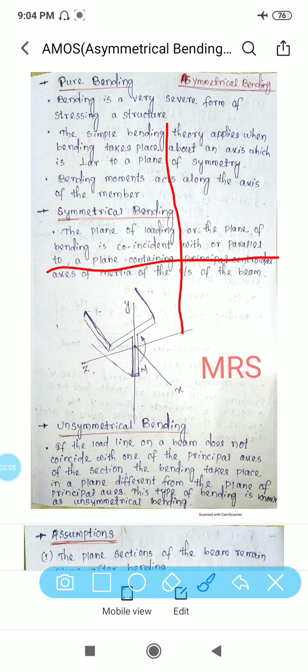Meaning, you assume this is your plane of loading, this is your plane of bending, and another is your plane containing the principal centroidal axis. If they coincide at a single point, then this is known as uniplanar bending.

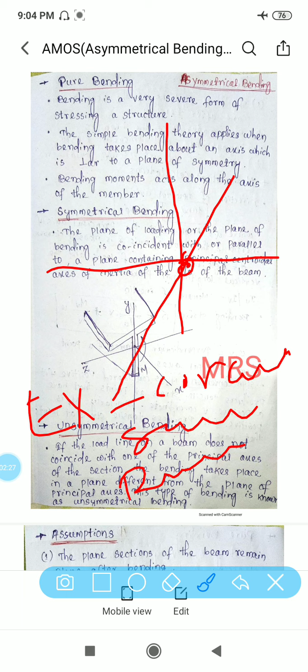Example: circular cross section, square cross section, rectangular cross section, and equal arm I section are examples of symmetrical bending.

Then, for unsymmetrical bending - if the plane of loading does not coincide with the plane of bending or the plane containing the principal centroidal axis of inertia, then this is known as unsymmetrical bending, or non-uniplanar bending.

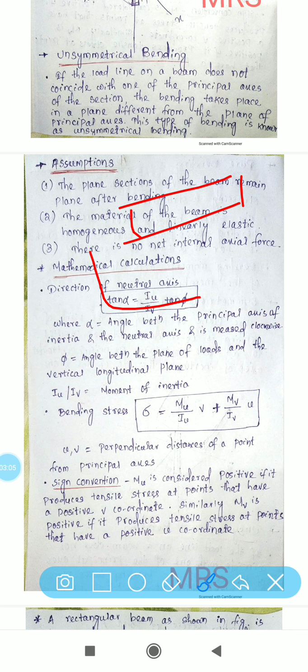For example, L section, unequal I section, and T section are examples of unsymmetrical bending. So next, see the assumptions for this.

Assumptions you must take when considering symmetrical or unsymmetrical bending. First assumption: plane sections of the beam remain plane after bending. Meaning, before loading the plane section is like that, and it remains so after bending. So this is your first assumption.

Second assumption is the material of the beam is homogeneous and linearly elastic. Homogeneous means a material of uniform composition throughout that cannot be mechanically separated into different materials. Meaning the composition should be uniform throughout the material, and you cannot separate the material mechanically.

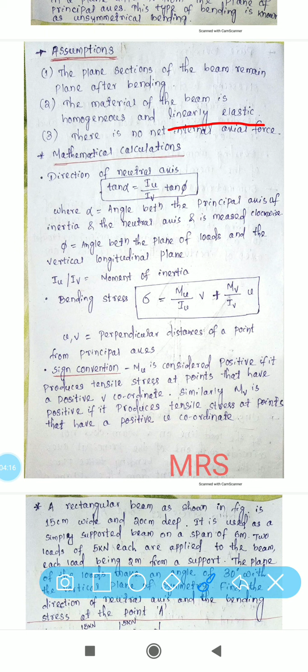Linear elastic means all operations are done within the elastic limit. And the third assumption is there is no net internal axial force.

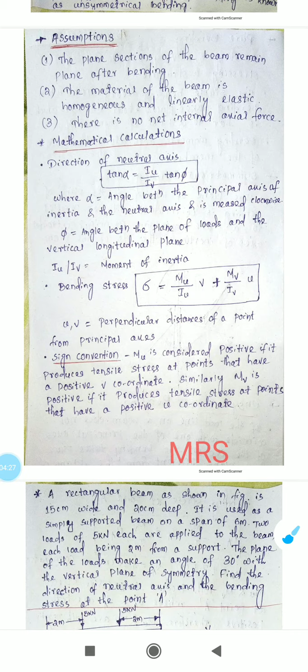Next is the mathematical calculation for symmetrical and non-symmetrical bending - how you can calculate the direction of the neutral axis. This is your expression: tan alpha equals IU divided by IV into tan phi, where alpha is your angle between the principal axis of inertia and the neutral axis, measured clockwise.

Phi is the angle between the plane of load and the vertical longitudinal plane. IU and IV are the moment of inertia about the UU and VV axis.

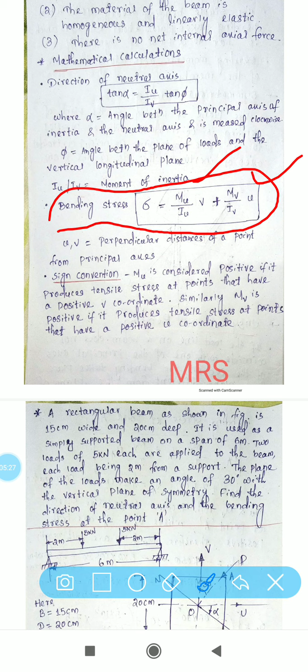Next, how you can calculate the bending stress - this is the expression: sigma equals MU divided by IU into V, plus MV divided by IV into U. U and V are the perpendicular distances of a point from the principal axis.

Next is the sign convention. For MU and MV, the moments for the UU axis and VV axis - MU is considered positive if it produces tensile stress, and MV is considered positive if it produces tensile stress, otherwise it will be negative.

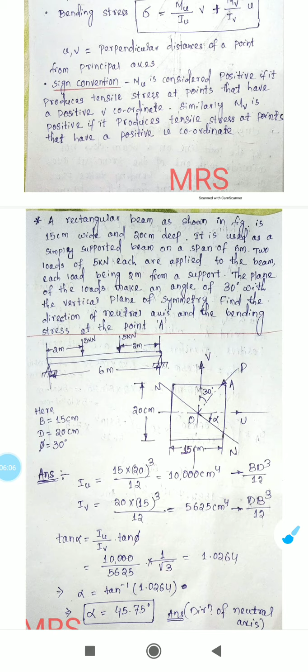Next, see a problem related to the above chapter. A rectangular beam as shown in the figure - this is a rectangular beam, 15 centimeter wide and 20 centimeter deep.

It is used as a simply supported beam on a span of 6 meters. Two loads of 5 kilonewton each are applied to the beam, each load being 2 meter from a support.

Two loads are acting from the support at a distance of 2 meters. The plane of load makes an angle of 30 degrees, which is the plane of load making an angle of 30 degrees with the vertical plane of symmetry.

Find the direction of the neutral axis and bending stress at point A. This is point A, which you have to calculate.

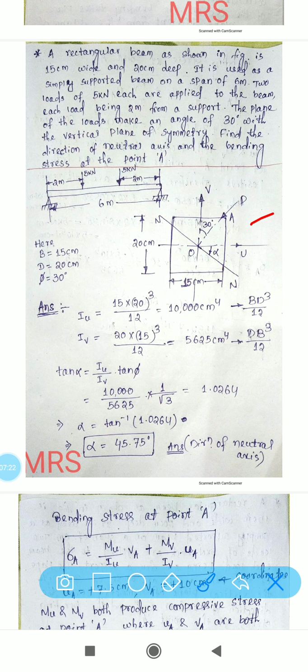This is a rectangular cross section having dimensions 15 centimeter and 20 centimeter. First you have to calculate IU and IV, the moment of inertia about the x axis and y axis, or UU axis and VV axis. You have the formula BD cubed by 12 and DB cubed by 12, so put the value of B and D to get IU and IV.

IU value is 10,000 centimeter to the power 4. IV is 5,625 centimeter to the power 4.

Then how can you calculate the direction of the neutral axis? You have an expression for the direction of the neutral axis.

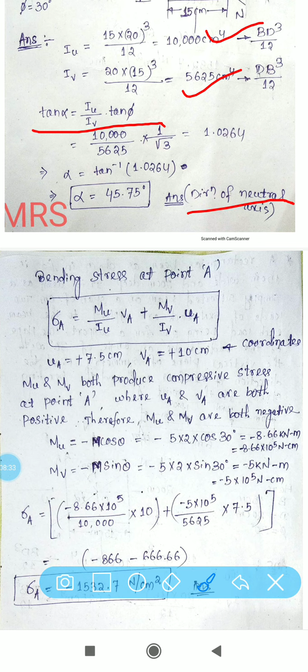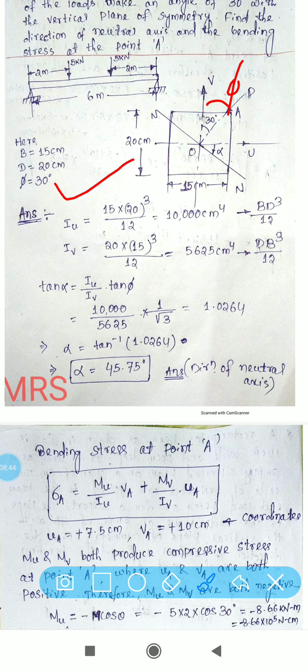Tan alpha equals IU divided by IV into tan phi. Put the value of IU and IV, and tan phi is for 30 degrees, this is the phi angle, known as phi angle. Phi angle is 30 degree, so tan phi equals 1 by root 3.

Finally, alpha equals 45.75 degree. This is the direction of the neutral axis.

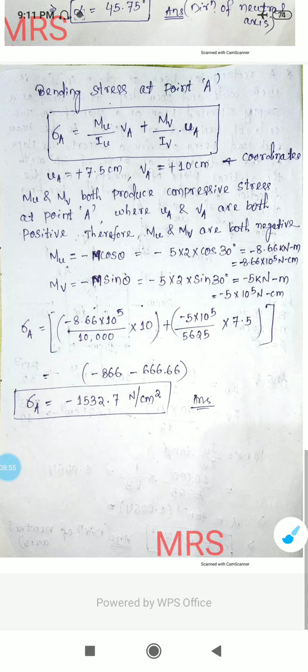So how you can mention in the figure: this is the direction of the neutral axis. This is the major principal axis, this is the minor principal axis, and this is the neutral axis. The neutral axis is situated in between the major principal axis, and the angle is the neutral axis angle, that is alpha.

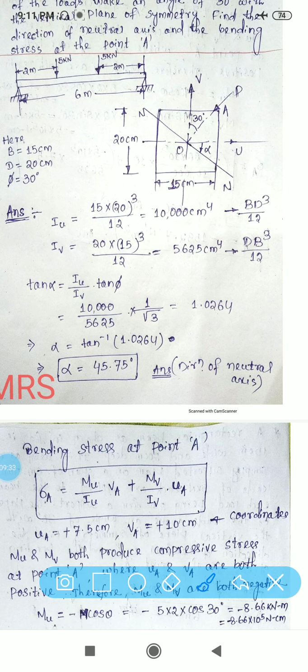Alpha equals 45.75 degree, which is in the clockwise direction. Next, bending stress at point A - this is point A, and you have to calculate the bending stress at point A.

So put the formula: sigma equals MU divided by IU into VA, plus MV divided by IV into UA. You have values IU and IV, then you have to calculate UA and VA.

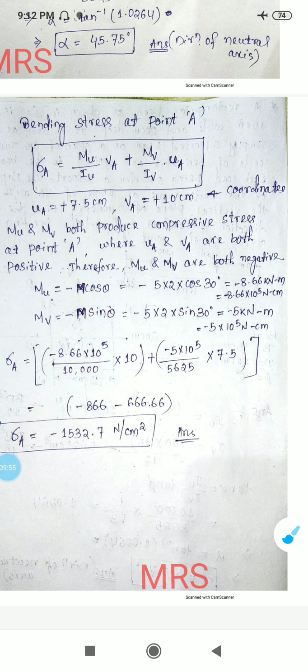UA and VA are the coordinates at point A. At point A, the coordinate is: this distance is known as UA, this distance is known as VA. UA becomes 7.5 centimeter, VA becomes 10 centimeter.

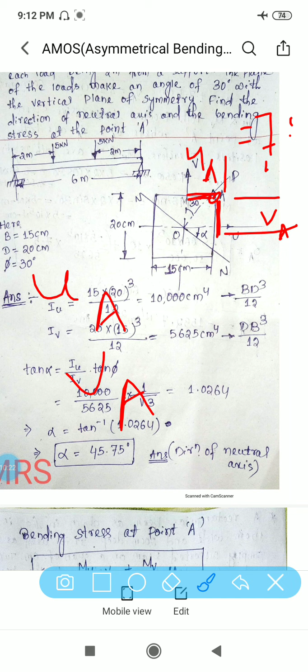So UA is 7.5 centimeter, VA is 10 centimeter - these are the coordinates at point A. Both are positive because A is situated at the first quadrant, so U and V are the positive coordinates.

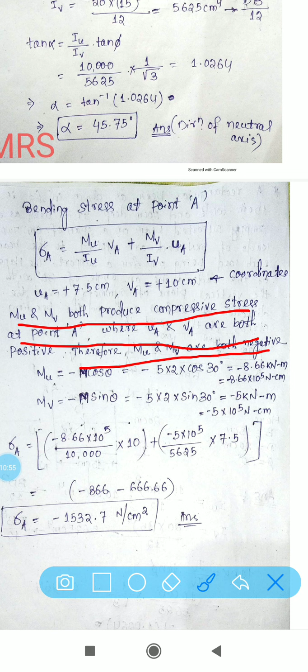Then the sign convention for MU and MV: both MU and MV produce compressive stress at point A where UA and VA are both positive. Therefore MU and MV are both negative. Why are MU and MV negative in nature?

What type of beam is this? A simply supported beam. Whenever loads are acting, it becomes deflected, and the upper side becomes compressive in nature while the lower side becomes tensile in nature. Since point A is situated on the upper side, it becomes compressive, while the lower side becomes tensile.

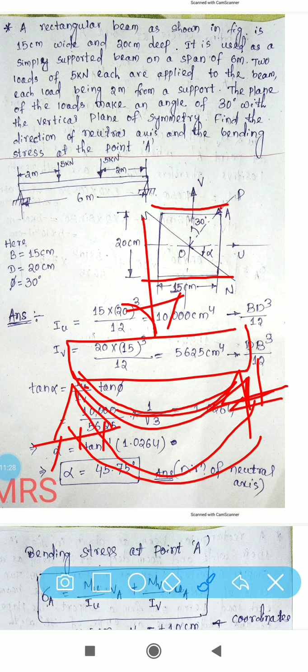If you take a point here, point B, then B is positive in nature.

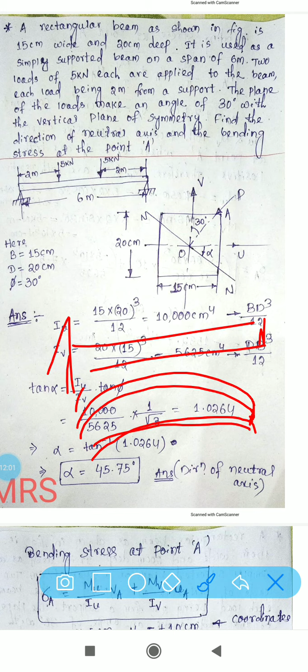If you take a cantilever beam in place of a simply supported beam, then the condition will be reversed: the upper side becomes tensile, the lower side becomes compressive. At that time, point A becomes positive.

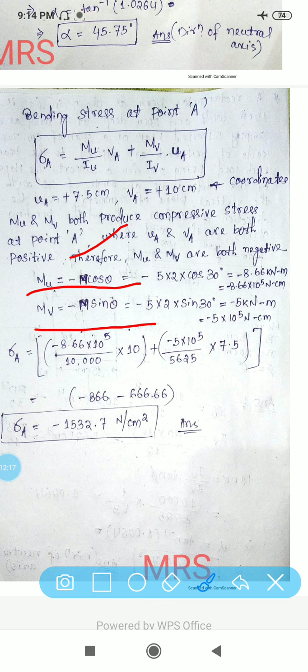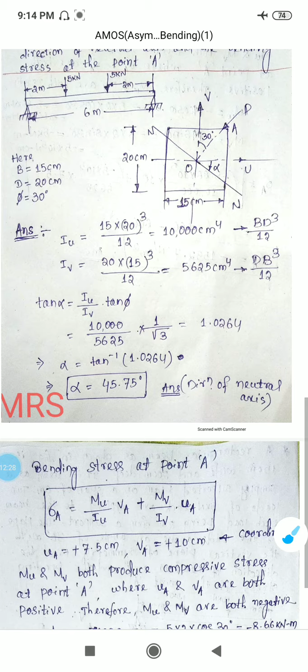So here MU and MV are negative. Then MU value and MV value: MU is M cos theta, MV is M sin theta, with the minus sign meaning it produces compressive stress. M is moment, force into distance. Force is 5 kilonewton, distance is 2 meters, so 5 into 2 gives the moment. Put the value to get MU value and MV value.

Next, how can you calculate the bending stress at the point? This is the expression - put all the values, then get sigma A equals minus 1532.7 Newton per centimeter square.

This is all about symmetrical and unsymmetrical bending. Thank you.